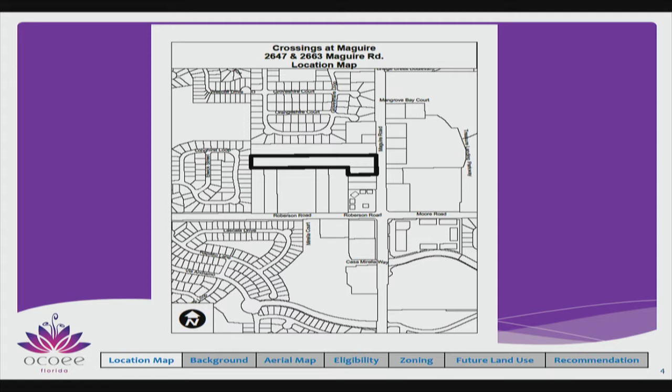It will require an amendment to the joint planning area agreement with Orange County, and specifically the joint planning area agreement map. We also have an additional property that will be applying for an amendment to the joint planning area agreement as well.

What you're going to see on the proposed plan unit development, so it's a rezoning to PUD land use plan, is 4 future buildings.

We have adjacent, it looks rural, but it's a veterinary office. Those properties are in Orange County, and were able to come in under well and septic, so they're still in the county. These will change in the future as they're one of the few more developable pieces left on the south side, but we saw that with the Rustique here.

On the north side, you have an existing self-storage facility, ground level outside access. You have a subdivision to the north side of that, and a subdivision on the west side.

The annexation of the large 4.52 acre property is eligible for annexation. It's in our joint planning area, adjacent to the city on all sides. It'll reduce the enclave. We provide water and sewer, police, fire. It's a logical extension. This is an existing zoning map.

The trips were programmed for office at 6 acres, so it had an assumed amount of trips in the land use. Maguire Road tests fine. There's one element of this site that brought our traffic reviewers' attention that we're going to work on - it's not in regards to this site plan, it's just something we noticed. The Maguire Road didn't show, but there's an entrance into the shopping center directly across.

It has full access left and right, but that access point is less than 660 feet from this intersection. We're going to look at, as an improvement to Maguire Road in the future, putting a directional left in front of these entrances. So when you're coming south, you can turn left into the shopping center. When you're going north, you can turn left into the site. But when you're leaving the site, you wouldn't be able to make the left exiting.

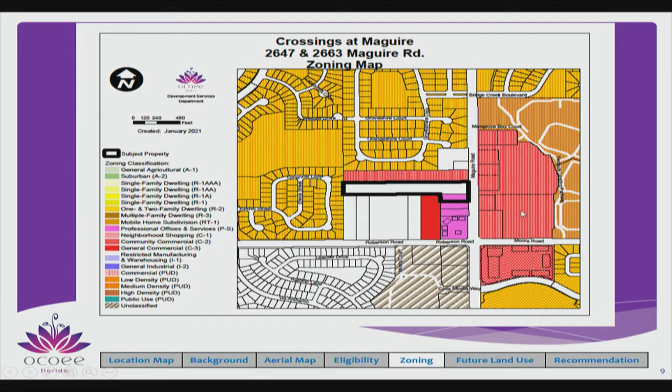The shopping center has 4 other entrance and exit points, and anyone going south making a left here is going to Roberson, so they can exit at the top. They've got 2 more exits down here, so they have a number of ways. It's just something we're looking at in the future to help with Maguire Road as it gets nearer to, or exceeds, its level of service.

So I was looking at the report, and it says the intersections will continue to operate satisfactorily at project build-out in 2022. But what happens after? When they do the study, they take in background traffic, trips that are approved but not out there yet, like the Inspiration PD that's developing - those background trips are loaded into the system. So it's a recognition that as they go to civil plans, we want to look as a city improvement at that, using the directional left, to see if that would be the optimum future.

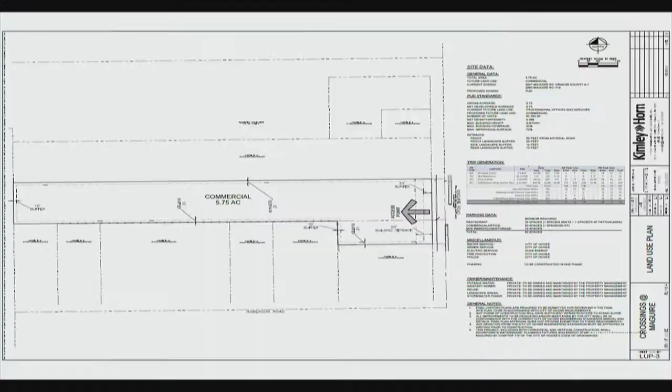But it's not a result of a development, because they developed Maguire Road with this being an office land use, and we created the left turn in already - it's out there today. So the site will be connecting to city sewer, and there's potable water adjacent to it already.

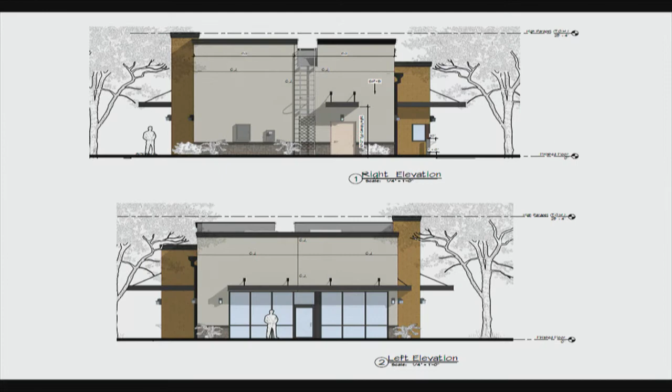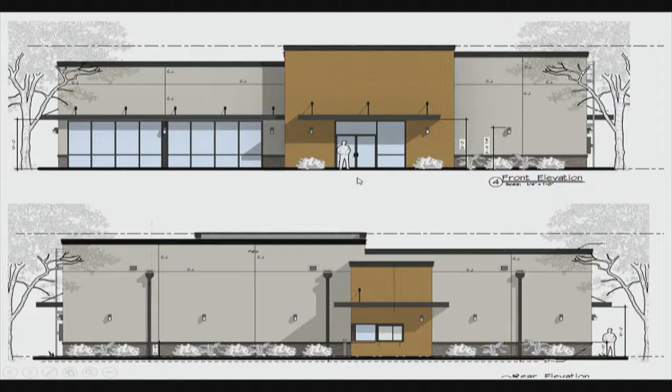These are the elevations - this is the coffee shop, this is the bank credit union, the office commercial in the middle, and then you have the self-storage in the rear. What you're seeing is the windows - the front elevation has windows, but the side and rear elevations will not have windows, so there will be no windows on the 3 sides facing towards residential. The windows would only be on the front facade facing Maguire Road. That's a commitment that will be made as part of the planned unit development.

And the elevations are in the packet for that purpose as well. The applicant is here, and we do have an engineer on the phone, should you have any engineering questions that either the applicant or I are unable to satisfactorily answer. Do you guys have any other questions for staff?

I guess I've got 2 - go back to that plan right there. I know with it being another storage building, there's usually big box trucks, oversized cars, and they're gonna be parking right up front to unload if they're moving. Is there gonna be enough clearance? It's not gonna violate a fire lane, which leads me to my second question - if there was a fire, the fire department needs to get their ladder truck or big truck back there, will they even be able to make that turn in that really tight space?

Well, generally the fire department doesn't drive by a fire to park, they park in front of it. So they would be parking anywhere in this area and would have sufficient 400 feet to run the hoses, and they'll have a standpipe in that building. But they're still gonna have to turn around unless they back up. Well, if they need to do a rescue call, more of an ambulance type, they have sufficient space, it's been put through the auto turn.

The property to the south, the first parcel there - are there any contingencies from the city to create an exit or fire-through connection within both properties in the future? No, the Rustique property is way far ahead, that's where their stormwater pond is. We looked at that, but there's not an opportunity to make that work, because the sites all drain from south to north and then go that way, so their pond's gonna be in the back there.

The Rustique pond will be taking up all of this. It cannot be re-engineered to make the traffic flow a little bit better from one property, because Rustique's gonna be on Roberson. It would make it a whole lot easier, but we can't just take their property for an egress.

But we're creating stress there in that property, with the big buildings, the two buildings in there, one entry and exit. So it just seems it would make sense that when the city was in discussion with Rustique...

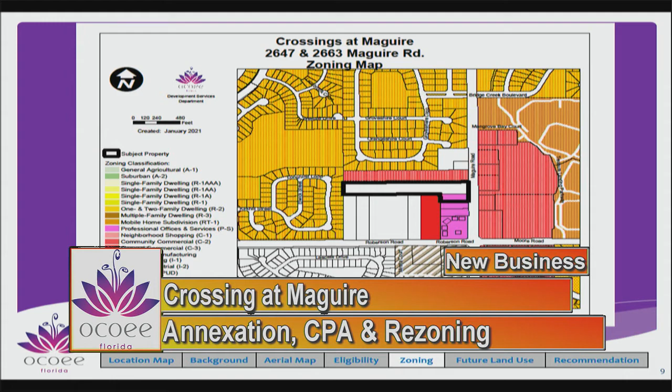Anybody else have any questions for staff? One more question regarding phasing: is the plan for development of this to all occur by 2022, or is this going to be gradually phased? So it is planned for all to be in place by 2022?

All of the development, all the drive aisles, parking, stormwater, utility hookups will be done in one phase. I'll let Alex come up here and talk.

You were talking about the drainage and the pond. There is a drainage ditch in my backyard. So how is that drainage, is that going to affect my yard?

Good question. So how the drainage goes is, the basin is a closed basin. There's not a series of lakes that the water runs to. And so the drainage all comes through here and goes through the ditch.

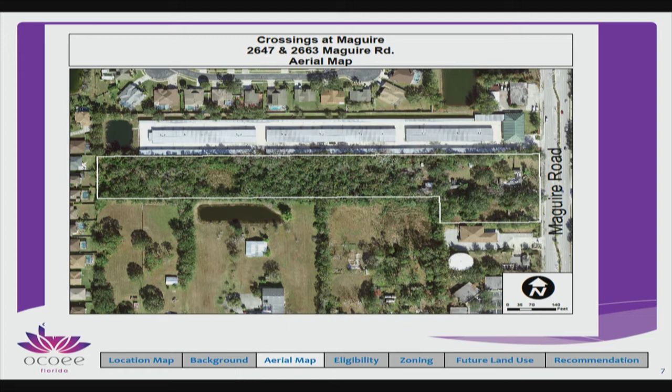This pond pops and it runs this way. So as part of the drainage permit between the state, St. Johns River Water Management District, and the city of Ocoee, the site has to hold what's called the 100-year storm event, and no more water than what currently hits the site can run that way. Not another drop in the post-development. So when they do all the development, that pond has to hold a very significant stormwater event, and not a trickle of water more than goes to that ditch can go there. And that's how it will be designed.

When you're talking about the pond draining to the left, that water in my backyard actually drains to the right. Well, the way the drainage goes is all of this, the whole thing goes that way. Maybe yours goes into a collection and goes back to that, because there's a grate, a metal grate, and then it gravities it. So your lot's going that way, putting it to the grate, then it's taking it. Okay, all right, cool, thank you very much.

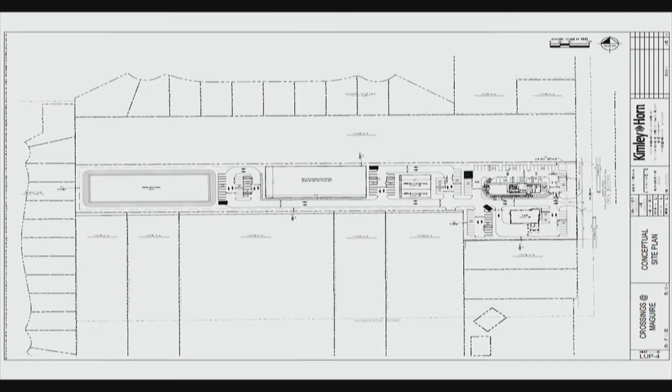I did want to state that we've got to take this, you're not going to see it for a while. We've got to take it to a joint planning area agreement amendment with Orange County, and we'll take it with another item that we just got submitted. Then when it gets through that process, we'll be bringing it for the first reading of ordinance and second reading. So if you don't see something on it, it's not because they backed out, it's that we've got to do another process. I tell you, by now I think we're all closed basin flood experts from the past 3 or 4 cases we've had.

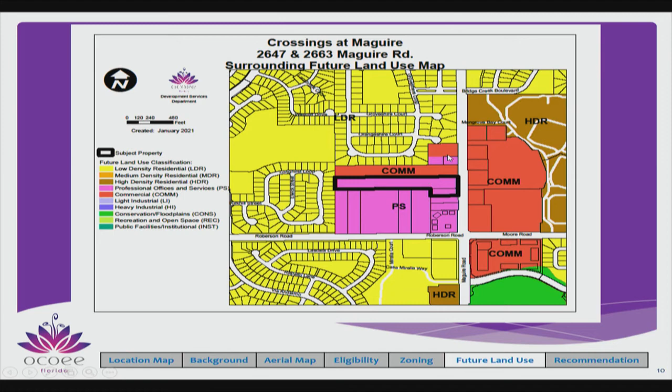Perfect, all right, now we need a second motion for the comprehensive plan. What is the address for that one? They're both the office land use, so they're both going to commercial. Okay, so I'll make a motion to recommend rezoning to the PUD at 2647 Maguire Road and 2663 Maguire Road for RZ 2010-13. All right, we'll switch to the rezoning then. We have a motion for approval for rezoning. Do I have a second? I'll second. Perfect, all those in favor? Aye.

Great, carries. Now, can I have a third motion for the comprehensive plan? I make a motion to approve the comprehensive plan. We have a motion to approve the comprehensive plan CPA 2020-003. Can I have a second? I'll second. Perfect, all those in favor? Aye.